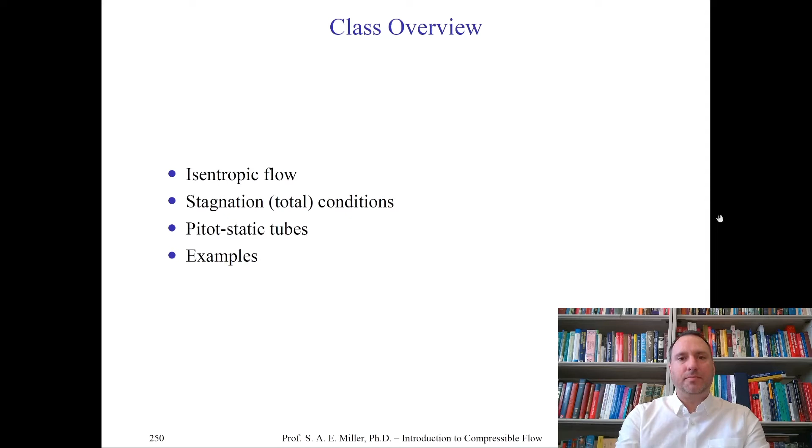Let's get started. I personally like to start with a fun quote. Here's one from John William Strutt, the third Baron Rayleigh, which we previously discussed. He wrote: 'Without encroaching upon grounds appertaining to the theologian and the philosopher, the domain of natural sciences is surely broad enough to satisfy the wildest imagination of its devotees. The work may be hard and the discipline severe, but the interest never fails, and great is the privilege of achievement.'

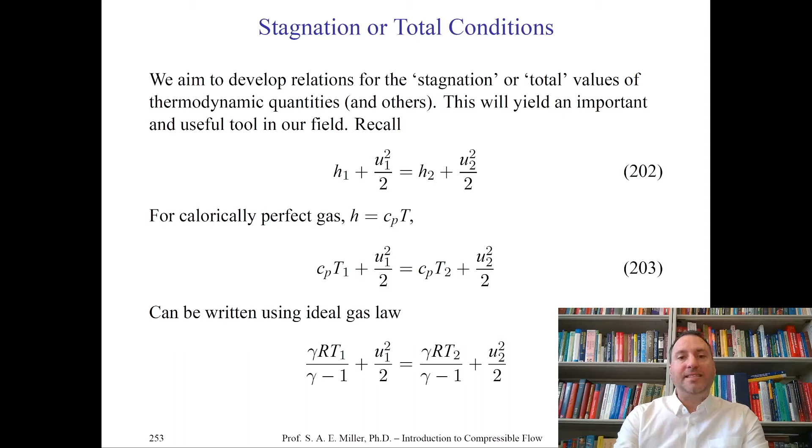Let's now look at the idea of total or stagnation conditions. A total or stagnation condition is where we might, in our imagination or physically on a vehicle, bring the flow to rest, that is zero velocity, isentropically. For example, we'll try to bring the flow to rest at a stagnation point at the leading edge of a high-speed vehicle.

Or at some point in an isentropic flow, we might imagine we bring the flow to rest instantaneously without any losses. These are the so-called total or stagnation conditions for the variables we look at, which are mostly thermodynamically related. So we'll try to develop these relations for the stagnation or total conditions for thermodynamic properties in particular, and a couple others which you'll find a little counterintuitive.

This will yield one of the most useful tools and most used vocabulary within our field. In our previous classes, we developed this equation, which I've relabeled as 202 in this slide deck. On the left we have specific enthalpy and kinetic energy. Remember, these must be constant in any particular isentropic flow because energy is conserved.

Now, if we assume, which we haven't yet for this flow, that the flow is calorically perfect, then we can write H equals C sub P times T, where C sub P is the coefficient of specific heat at constant pressure, and T is the static temperature. And you'll see why soon. I keep calling T and H and variables like it static values, because they're not the total or stagnation values.

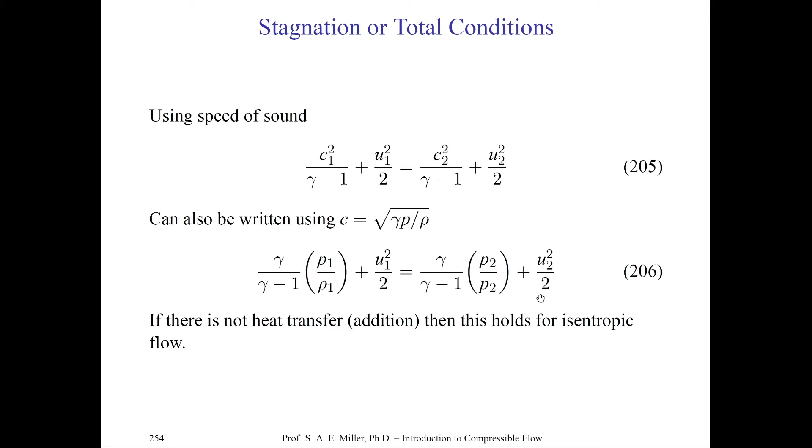Now remember, because of our assumption that the flow is isentropic, that there's no heat transfer and no change in entropy, we should consider this fluid being brought to rest adiabatically to Mach 1 with the speed of sound, and we'll call that C star, or U2 equals C star. We will substitute this to the right-hand side of 206. So U2 will be C star, and we'll leave the left-hand side the way it is. Here, C star is the so-called critical or reference condition, and it can be found in any given flow field given C and U.

Now imagine we do the opposite situation, where the fluid is brought to rest isentropically instead of to, say, a reference speed of sound. We can then let T and U be the static values of temperature and velocity respectively. We can then find C sub P T plus U squared over 2 equals C sub P T naught.

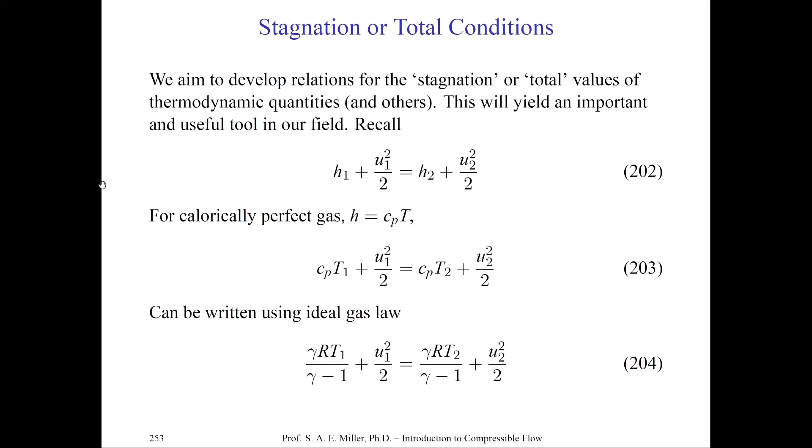This equation is derived from equation 203, where we would have C sub P T1 plus U1 squared over 2 equals C sub P T2. On the right-hand side, we would eliminate U2 because it's 0 if we brought the fluid to rest isentropically, with no heat transfer. And we would have C sub P T naught, and the left-hand side would be C sub P T1 plus U1 squared over 2. That's how we arrived essentially at equation 208.

In the context of the notation in 208, you'll see that indeed we have C sub P T plus U squared over 2 equals C sub P T naught. Let's look at the notation carefully.

C sub P, remember, is the coefficient of specific heat at constant pressure. T is the static temperature at some point in the flow. U is some velocity in the flow at the same location where T, temperature, is measured, squared divided by 2. On the right-hand side is the same coefficient C sub P, and T naught simply represents the temperature if the flow is brought to rest to 0.

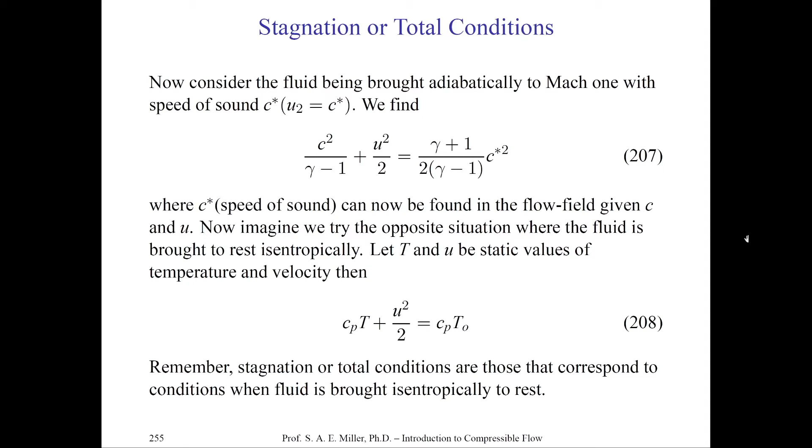This is a very powerful equation. You'll see through some examples of how it can be used. Remember, the stagnation or total conditions are those that correspond to conditions when the fluid is brought to rest isentropically. This last point is critical.

Now let's try and use this particular equation and the previously developed relation from thermodynamics for calorically perfect gases, that C sub P equals gamma R over gamma minus 1, where gamma is the ratio of specific heat, Cp over Cv, and R, of course, is the gas constant. Let's try and make this substitution for C sub P.

And we'll make the substitution, and we find equation 209, first line: T naught over T, that's the stagnation temperature, or the total temperature, divided by the static temperature, will be 1 plus U squared over 2 C sub P T, which is 1 plus U squared over 2 gamma R T over gamma minus 1 through some simple substitution. Now the rest is algebraic simplification.

And you'll see in here we've buried the speed of sound. So we'll have 1 plus U squared over 2 C squared over gamma minus 1, because of course gamma R T is C squared from our previous derivation, which can simplify to 1 plus gamma minus 1 over 2 times U over C all squared. The wonderful thing now is you'll recognize U over C as the Mach number.

We'll make that substitution and simplify it, and we find equation 210 in this slide deck, which you'll see is T naught over T equals 1 plus gamma minus 1 over 2 M squared. Let's remind ourselves of the notation.

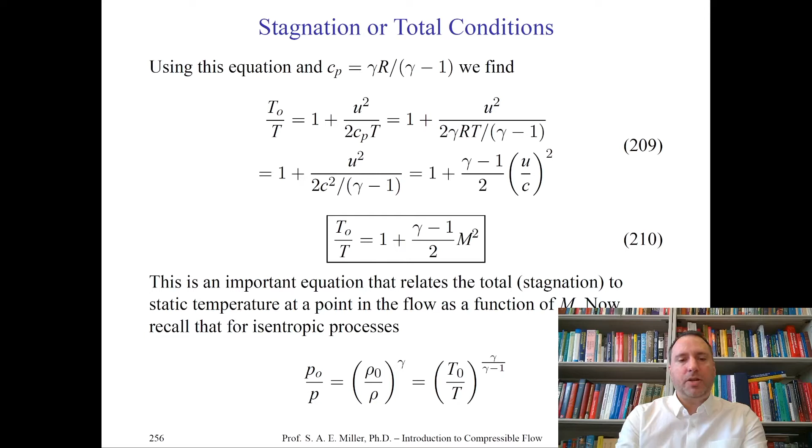Now, we've previously shown isentropic relations from the previous class for particular conditions of T2 over T1, etc. Recall those particular isentropic processes, that the ratios of T naught, which is the stagnation temperature, divided by the static temperature, to the gamma over gamma minus 1 power, go as rho naught, the stagnation density over the static density, to the gamma power, which is also equal to total pressure over P.

Here, P naught is the pressure we would find if we bring the flow to rest isentropically. Rho naught is the total density or stagnation density, if we bring the flow to rest isentropically. Remember, T naught is the temperature which we find if we bring the flow to rest isentropically. They're related by these particular powers.

So by using equation 210 and 211, we might be able to derive P naught over P and rho naught over rho, respectively.

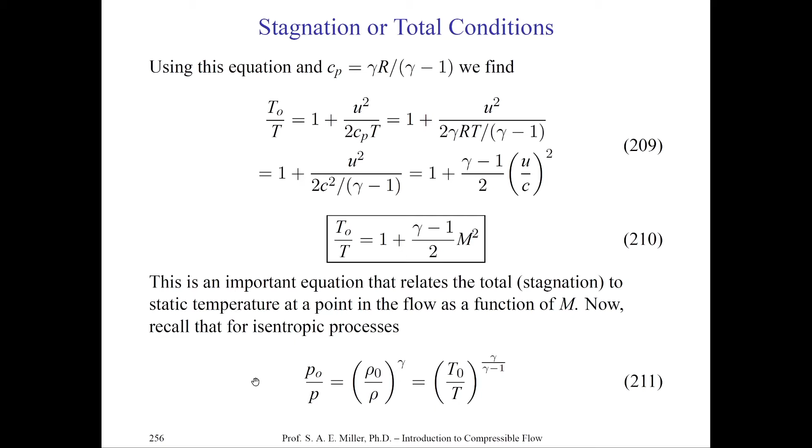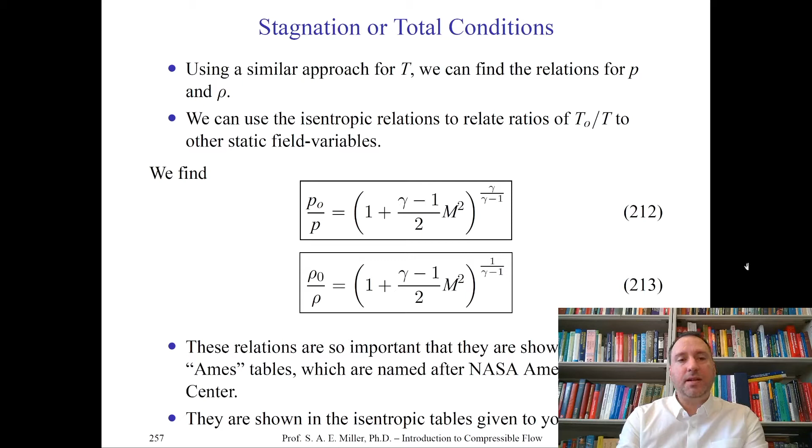Or, if you wish, you can use gas laws to convert temperatures to pressures and densities, respectively. We can use the so-called isentropic relations to relate the ratios of T naught over T to other static variables. Here I've shown the reduction of these equations, and the result of this analysis, shown in bullet point 1, follows the same process of derivation as T naught over T, boxed in this slide deck as equations 212 and 213.

We find P naught over P goes as 1 plus gamma minus 1 over 2 times M squared, raised to the power of gamma over gamma minus 1, and rho naught over rho equals 1 plus gamma minus 1 over 2 times M squared, raised to the power of 1 over gamma minus 1. You'll see they all have the same terms within the parentheses on the right-hand side.

So if you're doing this on a calculator, you only need to know the Mach number of the flow and the particular value of gamma, Cp over Cv, and the rest is easy. You only have to calculate the parenthesis and raise it to different powers on the right-hand side to find the particular ratios of stagnation conditions over static conditions.

These relations are so important in our field that they've been tabulated in books published by the National Aeronautics and Space Administration. The first widely used tables came out of NASA Ames Research Center in California, a famous research center. We collectively call these today, informally, the Ames tables, because they're on the desks of almost every aerodynamicist.

They're also shown in my own form of these tables, given to you in the class handouts, available on the class website or with your handouts. These are called the isentropic tables, listed by Mach number in the left-hand column, with ratios of P naught over P, T naught over T, and rho naught over rho in particular columns. In class, we'll go over these tables and explain them to you, and maybe later in some of these recorded videos.

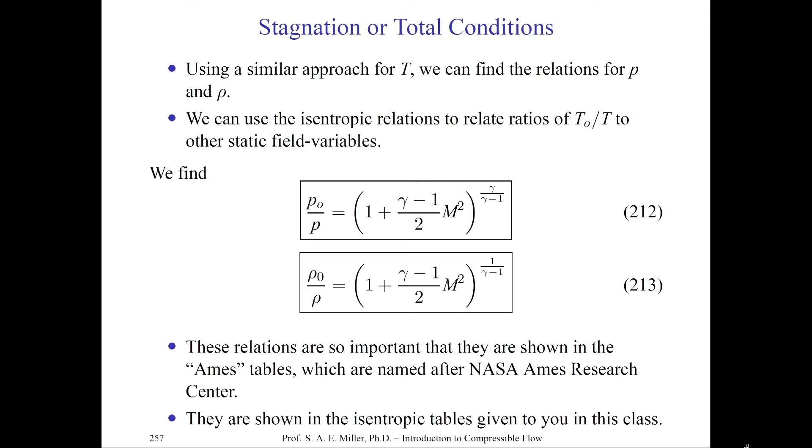Let's now turn our attention to an application of this theory: the purely isentropic flow through particular nozzles. We'll focus on the nozzle problem throughout this course because it's wonderful for illustrating all these concepts. Remember, fluid dynamics is highly nonlinear, so you shouldn't remember too many rules of thumb because there's always an exception.

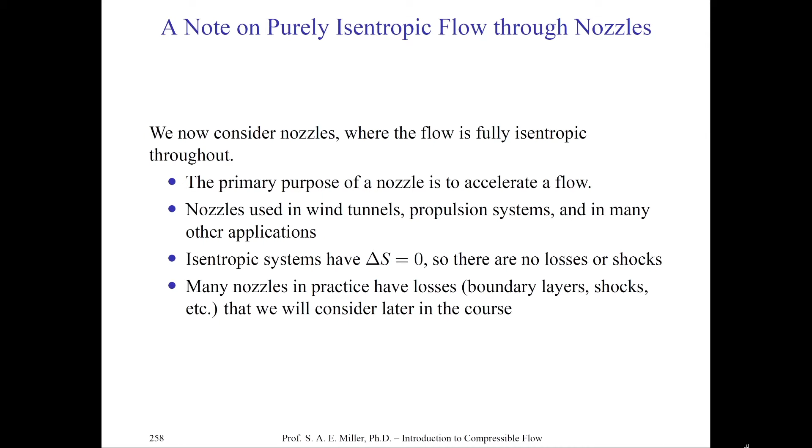We'll consider particular nozzles where the flow is completely isentropic throughout, meaning there's no heat transfer and the change in entropy is zero. The primary purpose of any nozzle is to accelerate the flow, taking some kind of energy and converting it into kinetic energy which produces thrust. That is, it just accelerates the flow.

Nozzles are used in wind tunnels, propulsion systems, and many other types of applications. You'll probably be surprised at how many parts of your everyday life use nozzles. Now, isentropic systems have a change of entropy of zero, with no losses in the flow and no shock waves in the flow, which we'll consider in the nozzle problem and many other problems later in this course, where the isentropic assumption breaks down.

Now, many nozzles in practice have losses, due to boundary layer turbulence, shocks in the nozzles, and different kinds of flow phenomena. We will consider these losses and changes later in the course.

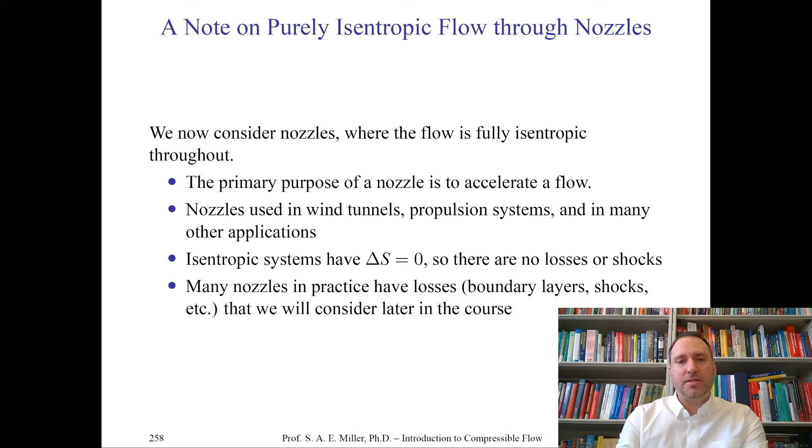Let's look at one particular example of isentropic flow calculation for stagnation or total conditions. Let's read the problem together to understand it. A perfect gas has gamma of 1.4. This means we've already made an assumption inherent in the problem, that the gas model is a perfect gas, and we can always close it with the ideal gas law, P equals rho RT. Gamma is 1.4; it might as well be air, where Cp over Cv is 1.4, the ratio of specific heats at constant pressure and constant volume.

Now, at some point in the flow, it is moving at Mach number 3. Remember, that's U over C. The Mach number is 3, but from this information alone we don't really know what the velocity or speed of sound is, so the problem is still rather undetermined.

Now we know something about the static properties. The static properties of the flow at that particular Mach number are T equals 250 Kelvin - notice I didn't say degrees Kelvin - the static pressure P is 101 kilopascals, and the density is 1.4077 kilograms per meter cubed.

We know the Mach number, that it's a perfect gas, and the ratio of specific heats. We know the static temperature, pressure, and density respectively. We are asked to find the stagnation or total conditions T naught, P naught, and rho naught. Note that we denote these total or stagnation conditions by the naught values, subscript little o's.

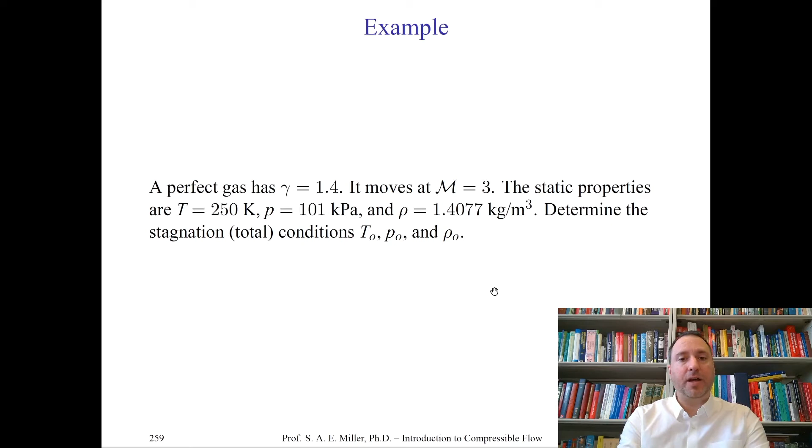Another way to view it would be to say we have a particular fluid element, volume, or parcel - using the correct historic terminology, a fluid parcel - and we brought it to rest isentropically, just in the air. What would its stagnation temperatures, pressures, and densities be? It's a simple calculation with the variables and equations we've defined.

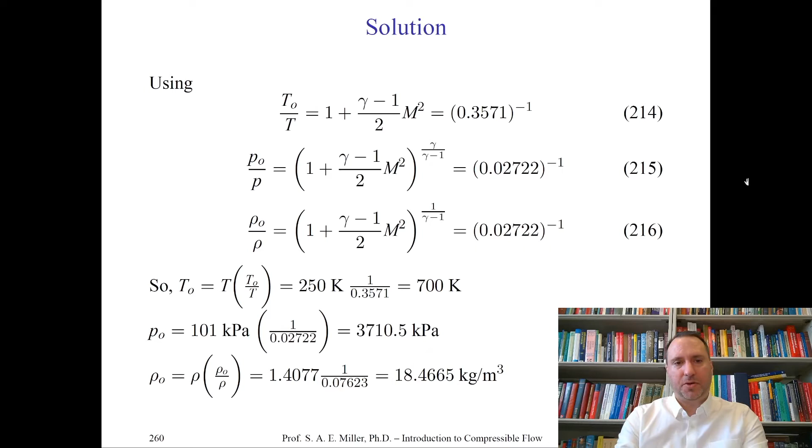We've already found ratios of the total temperatures to static temperatures, the total pressures to static pressures, and the total densities to static densities, shown on the previous pages. Let's look at the first form: 1 plus gamma minus 1 over 2 times M squared. We know M, which is 3. We know gamma, which is 1.4. We'll evaluate this term, and it turns out to be 1 over...

0.3571. We do the same calculations for P naught over P and rho naught over rho. We'll find, respectively, for the pressure, stagnation pressure to static pressure, and stagnation density over static density ratios as 0.02722 - and this is a typo, obviously. This should be a different ratio of 0.07623.

So check my math here. For some reason it was copied down incorrectly by the student who typeset my notes. I apologize for that error. We'll find through the correct ratios, and here's the correct ratio. It should be, for density, 0.07623 for the right-hand side of 216.

Nonetheless, we now have to put in from our problem definition T, P, and rho, which are the static values below the stagnation conditions on the denominator of the left-hand sides at 214 to 216 on this slide deck. Multiplying through, we'll have a stagnation temperature of 250 over 0.3571, equaling 700 Kelvin. We'll have a total pressure of 3710 kPa and a stagnation density of 18.5 kilograms per meter cubed.

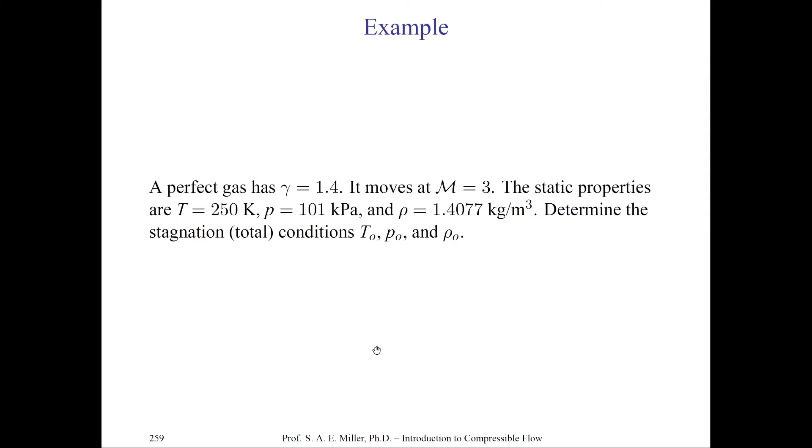What does this mean? At standard conditions in Mach 3, the temperature goes up from 250 Kelvin to 700 Kelvin - that's a humongous increase in temperature just at Mach 3 in a supersonic flow. The pressure goes from a single atmosphere to about 37 atmospheres. Finally, the density goes from a small amount of 1.4 kilograms per meter cubed, a little higher than standard atmosphere, to about 18.5 kilograms per meter cubed, just by stagnating the flow isentropically.

So you can see high temperatures and pressures can be achieved in our flows at Mach 3 in ideal ways. And this is true, of course, in realistic flows where there are shock waves in front of vehicles.

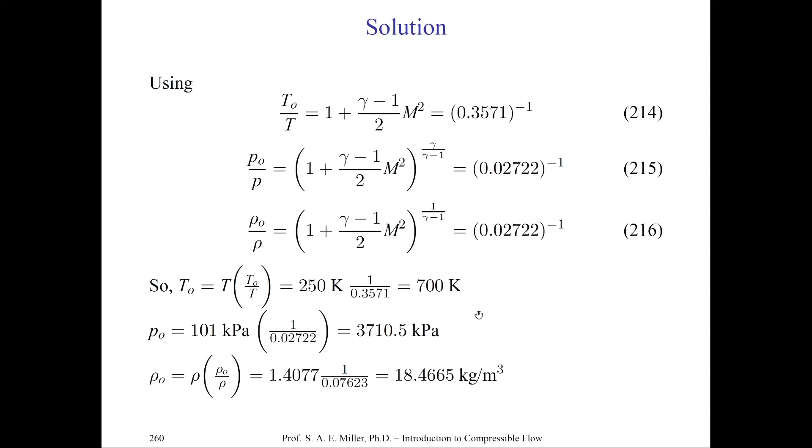We know that the static pressure in the atmosphere, P sub infinity, is 80 kPa. We'll find and estimate the largest pressure acting on the particular aerodynamic body. This M sub infinity and P sub infinity indicates the Mach number, pressures, temperatures, or anything written with subscript infinity as the ambient values.

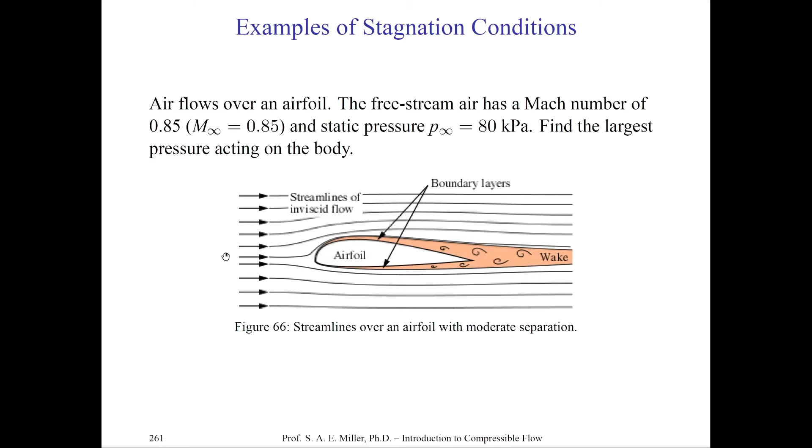Out here, to the left of the screen, is where we would measure Mach number 0.85 with a static pressure of 80 kPa. How do we solve this problem?

It's very likely that the highest pressure is acting at the stagnation point in the flow. The flow moves in from left to right and stagnates on the leading edge of the airfoil. We'll estimate that as the highest pressure, which is, of course, the stagnation pressure in the flow.

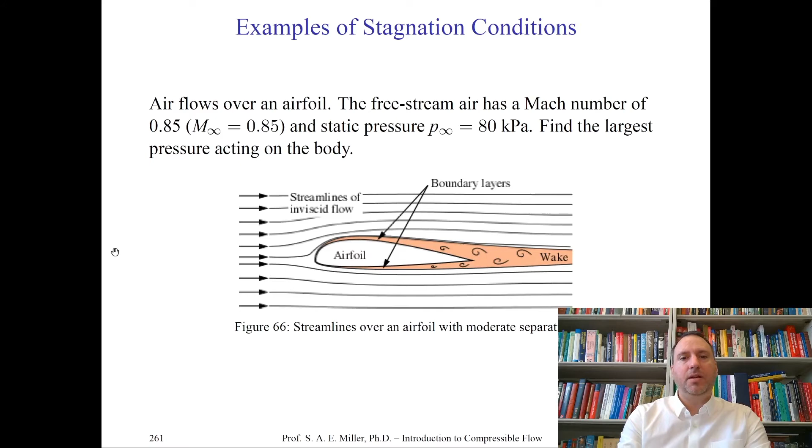We know the Mach number and we know the static pressure. We simply put in these values and find a static pressure ratio of P naught over P equals 1.604. We then put in P, our static pressure of 80 kPa, and multiply by 1.604 to get the total or stagnation pressure at the leading edge of the airfoil, right here at my cursor, giving a value of 128.3 kilopascals. That's wonderful. So the highest pressure we can estimate in this subsonic flow is about 128.3 kPa.

Indeed, measurements confirm our predictions.

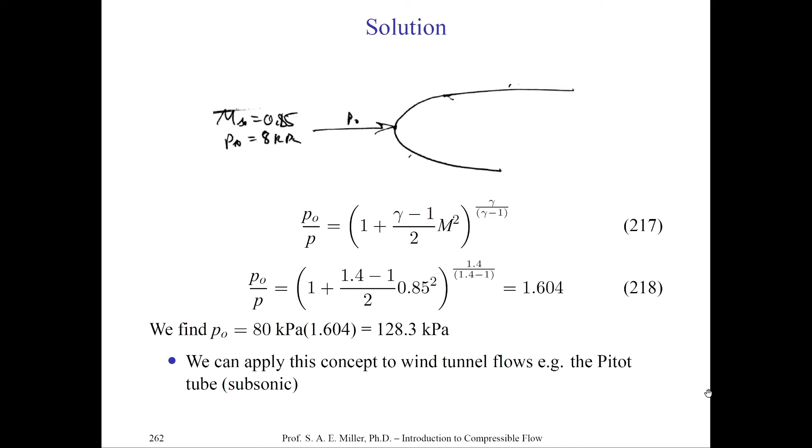Now we can apply this concept to wind tunnel flows, not just an external aerodynamic problem, to make measurements accounting for compressibility. We've never made an incompressible assumption. In your previous classes leading up to compressible flow, you likely derived a Pitot formula, a static or total type, which accounts for incompressibility but not compressibility effects. The advantage of this approach is we don't have to worry about that. We can always use these same equations.

Let's look at a particular device named, of course, after Pitot. This is the Pitot tube, and let's take the equation we've already developed and apply the Pitot tube formula, deriving it for this particular device.

So if we know the static pressure in a flow—that could be the atmospheric pressure in an external problem—and we know the total pressure in the flow, we can directly calculate the Mach number of a flow. So here we have the Pitot formula.

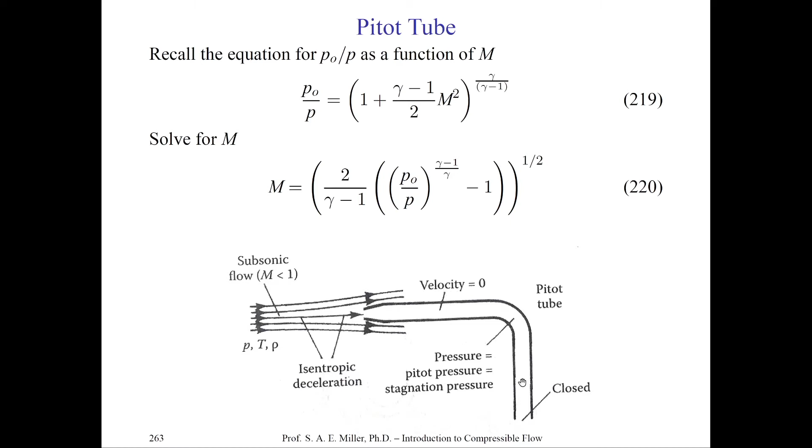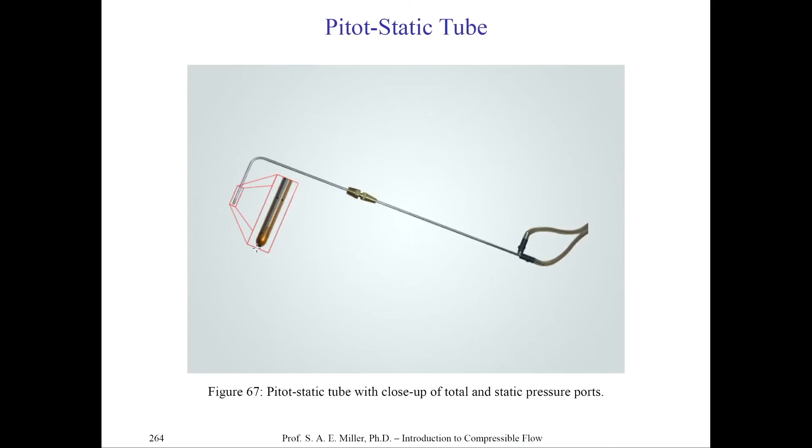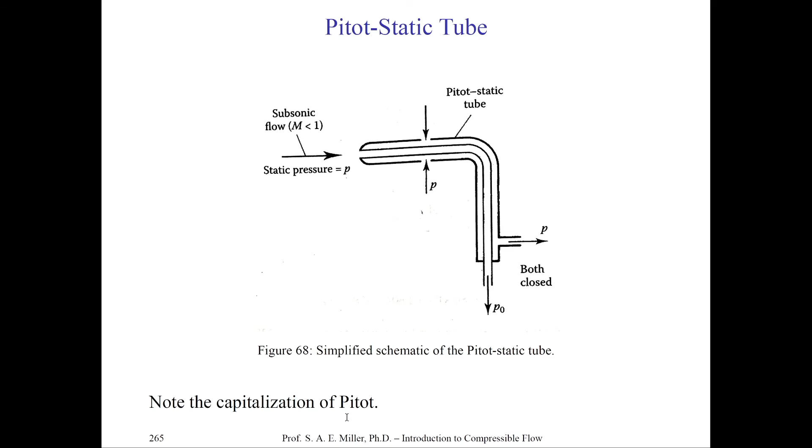We always capitalize Pitot in Pitot tube terminology because it's named after a person who originally measured the speeds of river flows with this concept. We honor his invention today by calling these devices after Pitot. A history on him will come later.

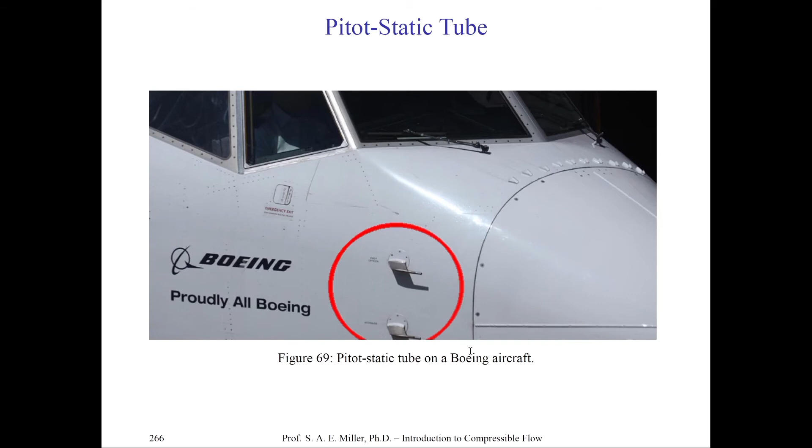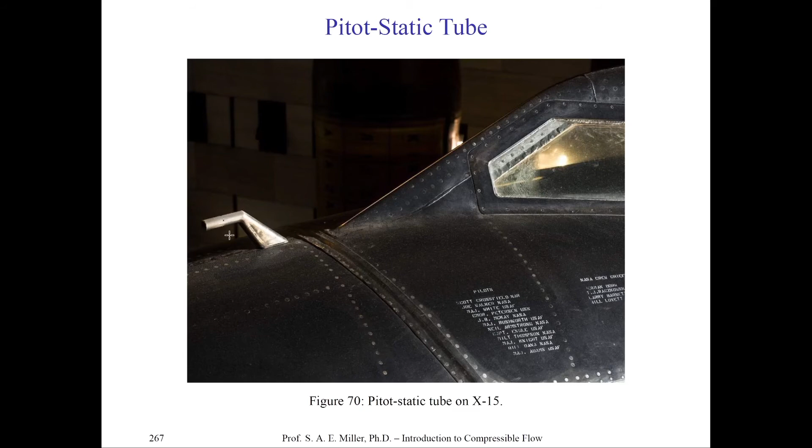On this particular Pitot tube mounted in front of the cockpit windows, you can see it has a very large stagnation port and very small static ports. You might wonder why they made it so large. We'll discuss that later in the class.

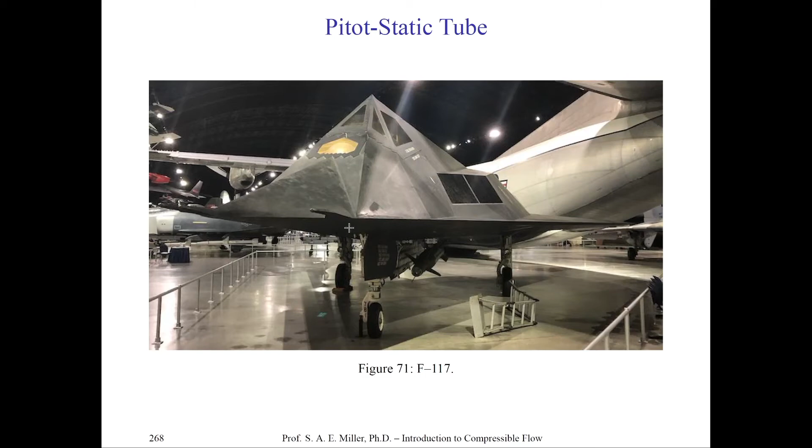Here's a very peculiar and interesting version of the pitot-static tubes. This is in the United States Air Force Museum in Dayton, Ohio, and I've taken these pictures of the F-117 stealth bomber. Up in front of the aircraft you'll see these points coming out, multiple of them, and these are Pitot-static tubes designed for stealth. They have a particular shape to reflect and absorb electromagnetic waves efficiently so the signal isn't returned to the radar.

Many people take 2 to 3 days to see every exhibit.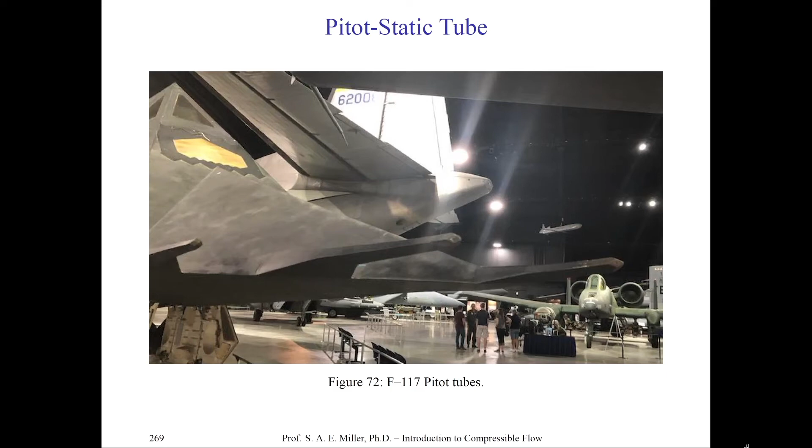Here's another famous aircraft, the predecessor to the SR-71, which I also photographed at the same museum. You can see it has a long tube off the leading edge of its cone-like fuselage in the front, with an arrangement of pitot-static probes just off the figure itself.

This was the YF-12 interceptor, and indeed the SR-71 program had a component of the YF-12, which was a supersonic interceptor. This aircraft was able to deliver a missile supersonically, in supersonic flight, looking down at a target moving supersonically. This was incredible at the time, pushed to intercept Soviet supersonic aircraft coming to deliver nuclear weapons to the United States.

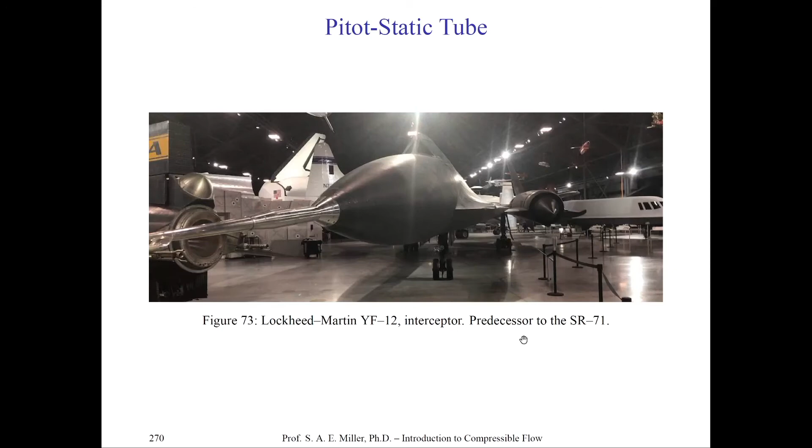Here's a picture of the tube. I stood right by the front of the aircraft, so if we zoom into this part, you'll see once again the long tube. There's a stagnation port here and here, and if you look closely, there are tiny little holes in the tube that are the static pressure ports. This was key for these types of vehicles so they could get their airspeed correct.

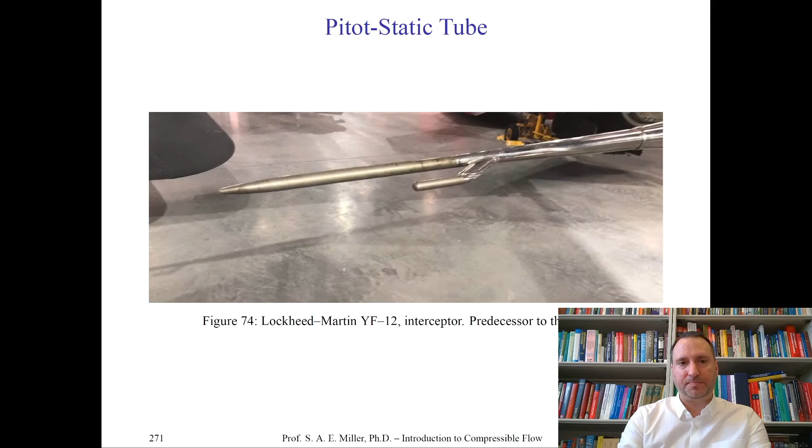Let's look at some examples of the famous Pitot static tube problem. I've made a typo here—I should have capitalized Pitot. That was rather rude in his memory. Please don't make the same mistake.

The static pressure and temperature in the flow are measured as 80 kPa at 12 degrees Celsius, respectively. So I've given you P and T of 80 kPa and 12 degrees Celsius. We now measure the difference between the total and static pressure as 200 millimeters of mercury. We're asked to find U infinity, the ambient velocity, and the Mach number from the measurements of the Pitot static tube.

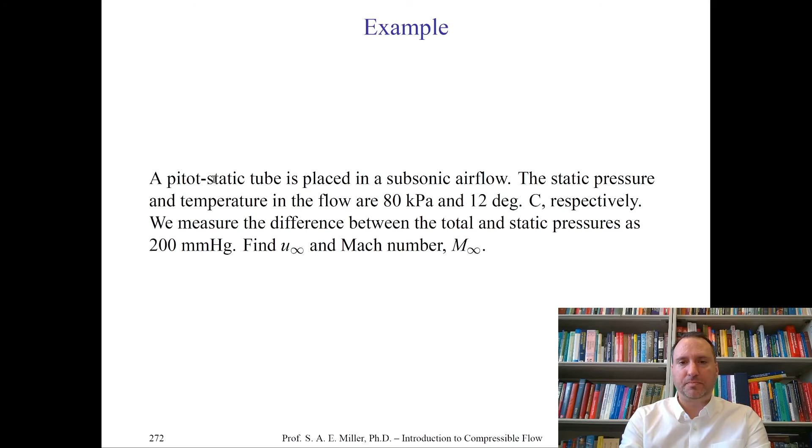Remember from your fluid statics lectures that for a manometer bank, the total pressure P naught minus the static pressure, based on the difference in heights of the mercury, equals the density of the mercury times the gravitational constant times the height change. Here I've given you the density of mercury, 13,580 kilograms per meter cubed, the gravitational constant of 9.81 meters per second squared, and the height of mercury, delta H, which we measure as 0.2.

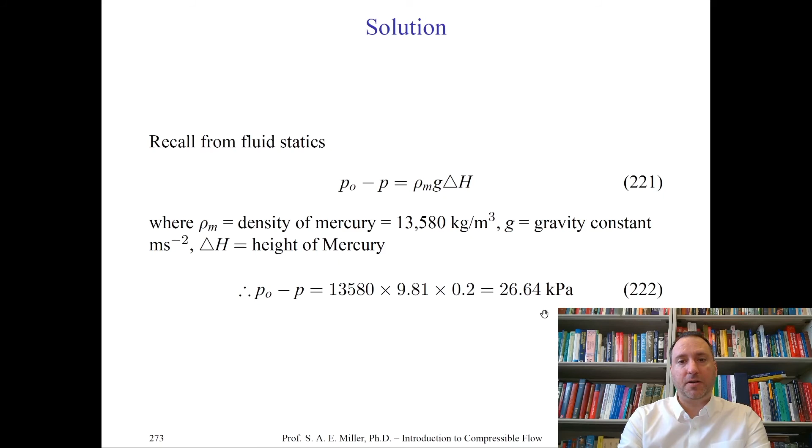We find delta P total, the difference between the total pressure port and the static pressure port, as the density of mercury, 13,580, times 9.81 meters per second squared, times the height of 20 centimeters. We find a value of 26.64 kilopascals. That's rather fun. Now we know the difference, and we know one of the static values, so we can find the stagnation value. What's next?

We need to find the appropriate ratio of stagnation to static pressure so we can derive the Mach number from our Mach number stagnation-to-static pressure relation.

I'll write it out: if I write P naught over P minus 1, I can rewrite that as P naught minus P over P, which equals 26.64 over 80 kPa, giving P naught over P a value of 1.3331. Now that I know P naught over P, I can use my equation M equals the square root of 2 over gamma minus 1, times P naught over P to the power of gamma minus 1 over gamma, minus 1. I'll put in my values for P naught over P, stagnation pressure over pressure measured by the pitot probe, and evaluate to find an ambient Mach number of 0.654.

So from the total pressure to static pressure measured by a pitot tube, I'm getting a Mach number of 0.654. That's the general Mach number of the aircraft if it's flying subsonically.

We can now find the actual velocity of the aircraft in meters per second through the Mach number relation. Remember, M equals u over c. Solving for u, I can write u infinity equals M infinity times c infinity. This is the ambient global Mach number of the aircraft.

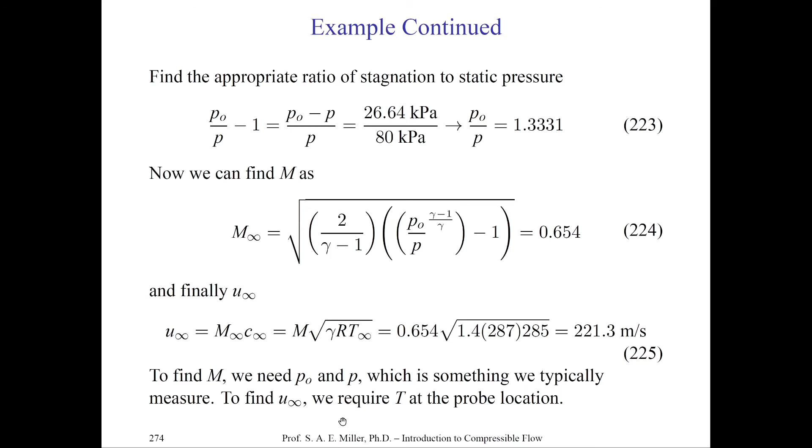Let's now turn our attention to examine errors in the so-called incompressible and compressible forms of the Bernoulli equation.

Let's look and return to Daniel Bernoulli, who the equation is named after. It's not named after his father or his brother, who were also active mathematicians and worked in fluid mechanics. In fact, there was some jealousy between Daniel Bernoulli and his father and brother because he had the most success. Here he is pictured in an etching on the right; he was born in 1700 and passed away in 1782. Like Leonhard Euler, he was Swiss, a mathematician and physicist, and one of the many prominent mathematicians among the so-called Bernoulli brothers.

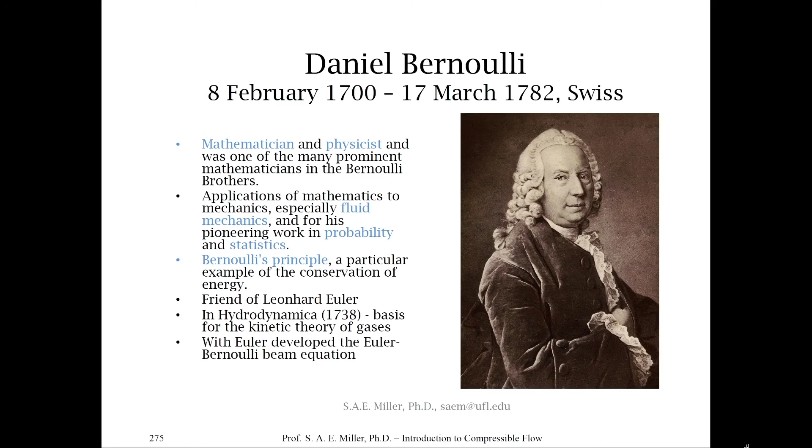He applied math and mechanics, especially fluid mechanics, and is known for his probability and statistics work. In the Bernoulli principle, which is a particular example of conservation of energy, we apply this to our class. He was, during his life, a great friend of Leonhard Euler, whom we already talked about. He wrote the beautiful book Hydrodynamica, which you can find free copies of online as scanned PDFs. This was actually the original basis for the kinetic theory of gases. With Euler, he developed the so-called Euler-Bernoulli beam equation, which you might have heard about in your structural classes.

Let's now look at the particular error in the incompressible theory relative to compressible theory with Mach number. This is our goal, and we'll try to plot that error with increasing Mach number.

Now, the classical Bernoulli result from your previous classes was that the velocity of the fluid, if measured by a pitot probe, was the square root of 2 times the quantity of the measured stagnation pressure minus the static pressure, divided by the density. Here, density rho infinity is the same everywhere in the fluid. This is, of course, wrong in compressible flow problems.

Now we need to find the corresponding equation that includes compressibility effects, which we've already built the framework for. You'll see in this particular equation, P naught minus P, we'll try and replace that particular form with our own.

We'll find P naught minus P goes as, if I write it, P times the quantity P naught over P minus 1, which I can rewrite as 1/2 rho u squared times 2P over rho u squared, times the quantity of 1 plus (gamma minus 1 over 2) M squared, to the power gamma over gamma minus 1, minus 1. In equation 227, you'll see the P naught over P quantity is replaced by our compressible flow relation for stagnation pressure over static pressure.

And we'll have 1 plus (gamma minus 1 over 2) M squared, to the power gamma over gamma minus 1, minus 1. The minus 1 is carried over.

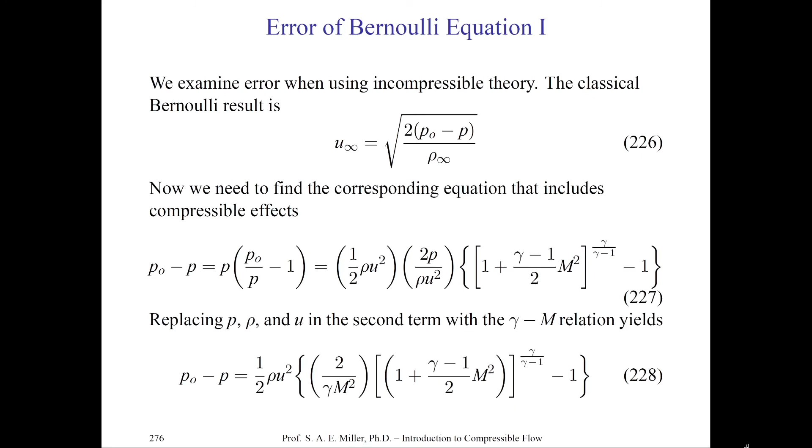Now, if we search for and solve for u and replace it as u infinity, we'll find equation 229. This is actually a lot of work, and from the previous example, it would be much easier to find Mach number and then solve for Mach number using the particular temperature relation.

Here the advantage is that we've eliminated temperature by using density and pressure in our formula. So essentially, the ideal gas law could be used to recover equation 229. We then find u infinity equals the square root of 2 times P naught minus P over rho times the quantity shown here from the previous equation. So we solve for u infinity now.

Now that we have u infinity estimated from compressible flow theory in 229, and the result you previously derived in fluid mechanics and aerodynamics, which is u infinity of 2 times P naught minus P over rho, look carefully between 229 and 230, the compressible form and the incompressible form. You'll see they're exactly the same equation, except for the second term in the squiggly brackets. This accounts for some kind of error between the incompressible and compressible forms, which is a function of Mach number.

That's beautiful, so we can now define an error. Let's call our error epsilon, and epsilon will go as the magnitude of the compressible velocity minus the incompressible velocity divided by the compressible velocity, which is of course the correct answer. That'll go through simplification as the magnitude of 1 minus u incompressible, which is 230, divided by u compressible, which is 229.

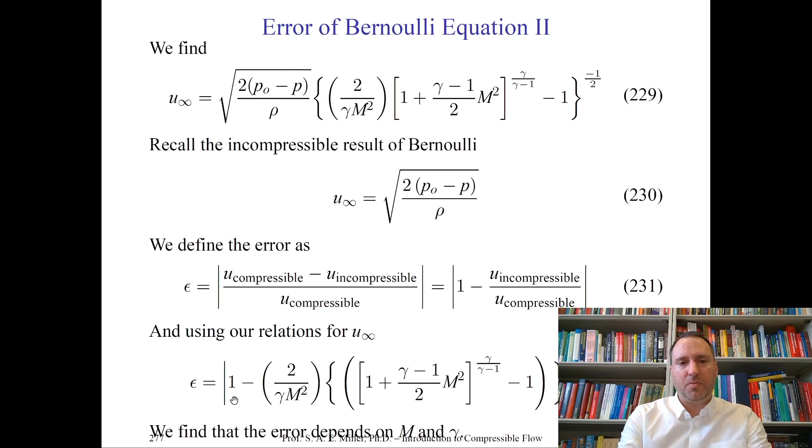Let's substitute in these relations, and I've simplified it for you, and you'll find that the error goes as the magnitude of 1 minus 2 over gamma M squared times this quantity of 1 plus gamma minus 1 over 2 M squared to the gamma over gamma minus 1, in squiggly brackets, half power. So you'll see the error entirely depends only on the Mach number and gamma, which makes sense because in 229 the term which accounts for the error between the incompressible and compressible results only involves M and gamma. That's a good check to make sure our calculation is correct. You'll also note that the error is in fact non-dimensional, which makes sense because we defined our error as a non-dimensional parameter, a velocity divided by a velocity.

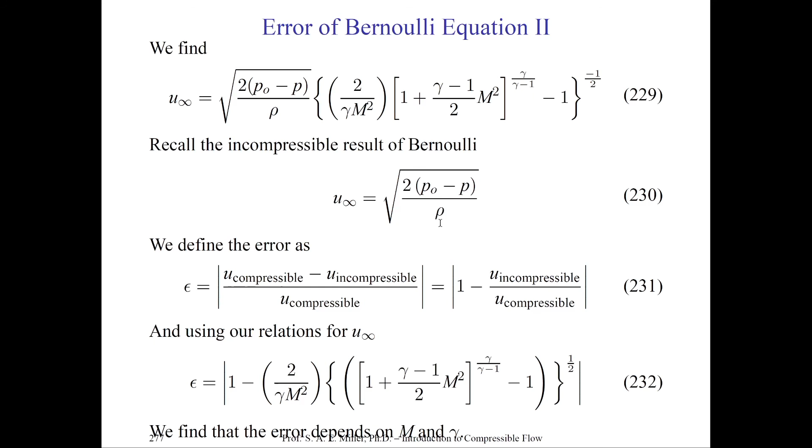Let's now plot equation 232 in the slide deck. Here's figure 75, error with Mach number of measured compressibility effect. The x-axis is Mach number from 0 to 0.6, and the y-axis is the error which we just derived in the previous equation. We'll set gamma to 1.4 for error, and we'll vary Mach number. If we plot the equation, it rises. At Mach 0, the error is 0 because there's no difference in the velocity at 0, and you can see that in these equations if we set M equal to 0. There's also no difference in the pressure, so that would be 0. Density is a positive constant in the incompressible case and varies in the compressible case.

You'll see now that the error increases all the way to about 1% near Mach 0.3. So this is why we say that the onset of compressibility in general flows, as a general rule of thumb, is about 1% at Mach 0.3. So if you care about an error of 1% or more, you should use compressible formulations for these types of flows. If you care about having zero error in the calculation, you can just use the compressible formulations throughout the entire Mach number range.

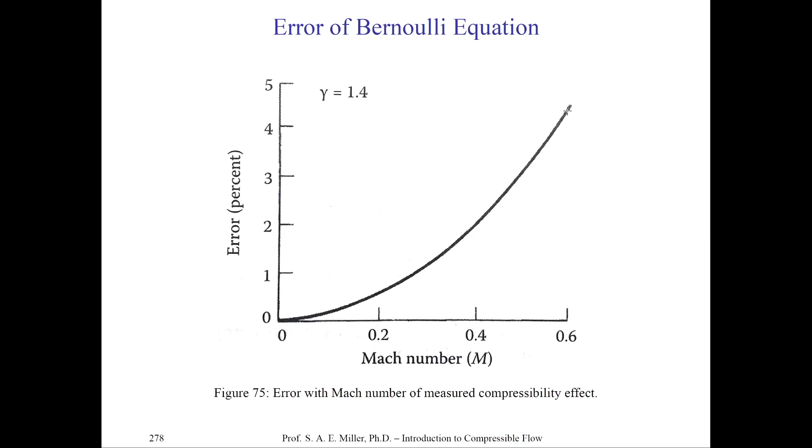It is highly efficient to use incompressible formulations, especially in computational fluid dynamics. So it would be very advantageous to make the incompressible assumption for low Mach number, where your errors are going to be on the order of 0.1%. You can see this rises greatly, and if we plot it all the way out to say Mach 1, the error increases dramatically. Nonetheless, this error formulation becomes flawed because of the onset of shock waves at higher Mach numbers, especially at transonic and supersonic speeds. So this error formulation is only valid for these low to mid-speed subsonic flows.

Here I show another example for the class, and I'll let you follow this example on your own.

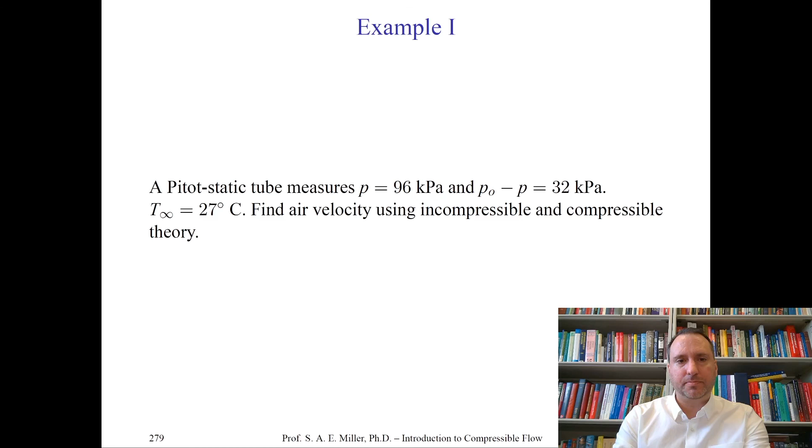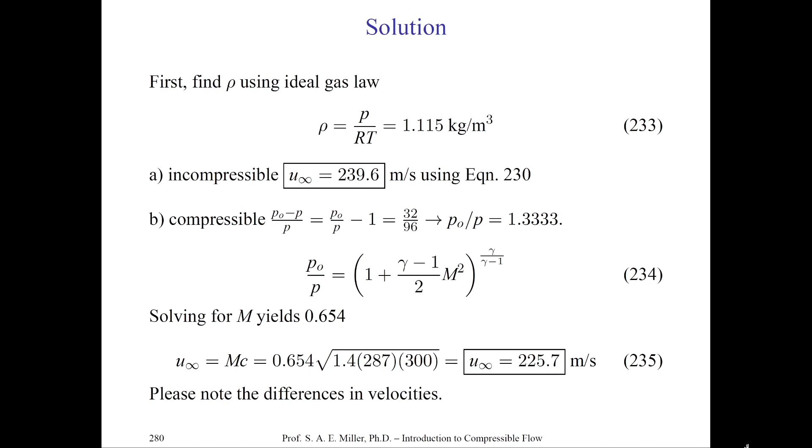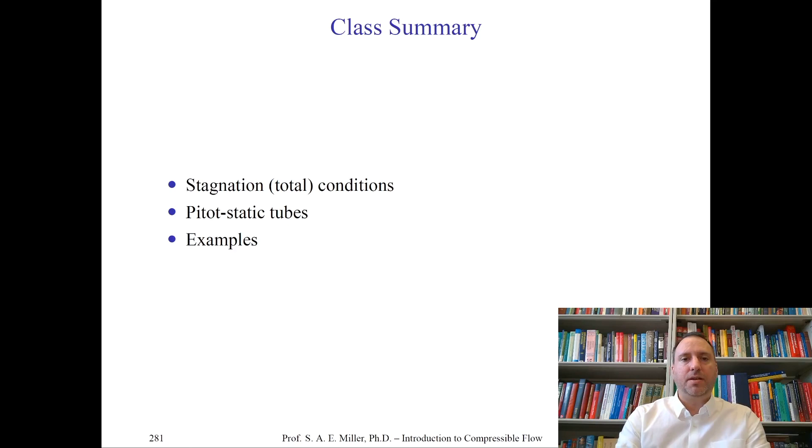In this class, we derived and explained and defined the so-called stagnation or total conditions, which we remember are used interchangeably. They are the conditions where we, in our imagination or physically in some flow situations, bring the flow to rest. They are a property which is constant along the streamlines or stream tubes in fluid parcels as long as the flow is isentropic. We then applied these equations to the famous Pitot static tubes and Pitot tubes in two particular problems, and showed examples for calculating Mach numbers and flight velocities of aircraft, and of course doing measurements in wind tunnels. Then we showed a few particular examples.